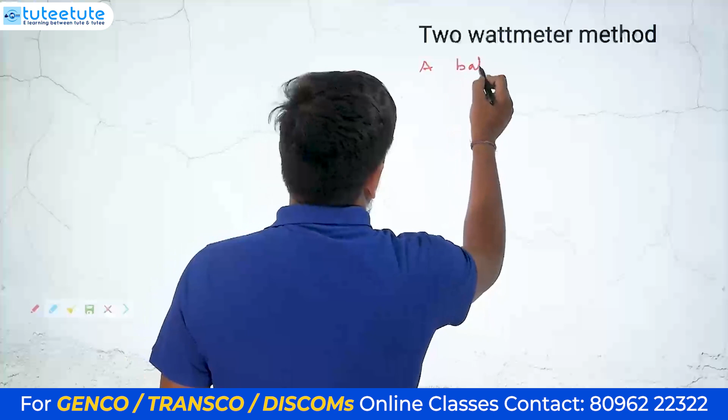So a balanced star connected load we are taking here. Understood, right? Anyway, we can take it as star connected and balanced. We can take it as 3-phase 4-wire or 3-phase 3-wire, anything. Star connection means there's a possibility of a 4th wire also, the neutral wire.

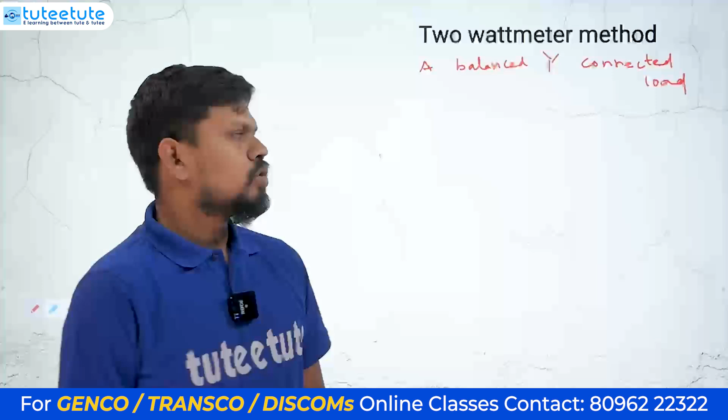Since it is balanced, no current will go through the neutral. So we can take it as 3-phase 4-wire or 3-phase 3-wire also. I am just taking a 3-phase 3-wire connection.

So first load we have taken, second load also we have taken, and third load we have to take. Like this, all the 3 loads are connected in star connection. So all the 3 loads we have taken and connected in star. This is star connection.

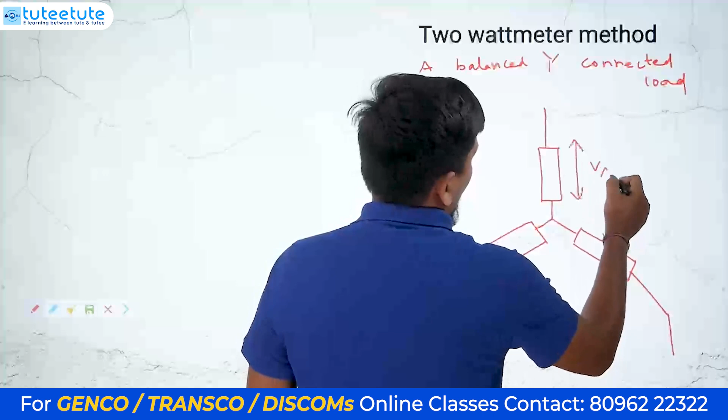Understood, right? So this is star connection. I am just taking the phase voltages. The voltage across this one is VA voltage, but otherwise you will take it as RYB, that will be more useful for you to understand. So VR, this is R phase, and this is Y phase. I'm taking this one as Y phase, and this is B phase. 3 phases we are taking.

If you ask me what is the phase sequence of this, I will tell you it is RYB phase sequence. You might already know about this. To find the phase sequence, we should not count in the clockwise direction like this. These are the vectors, otherwise we have to consider the 3-phase loads. First the R phase, and after that, which phase is coming after 120 degrees? The Y phase is coming. They are all rotating, so we have to give your hand here and check.

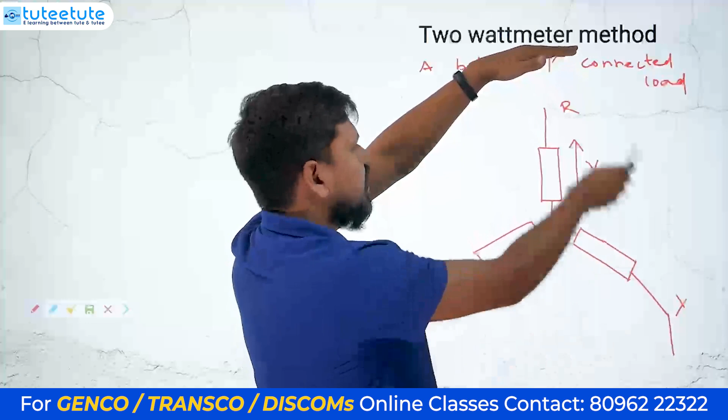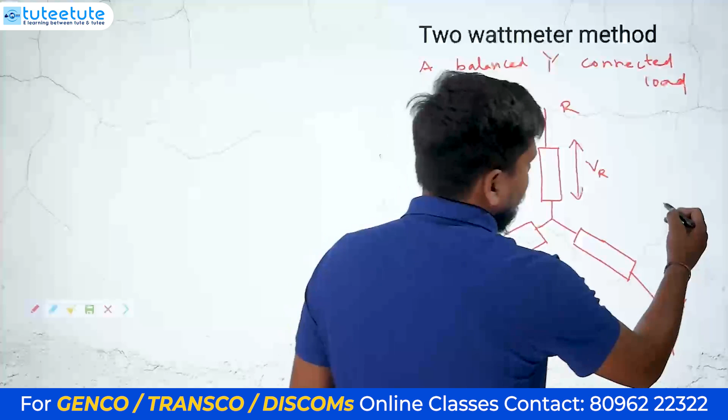First the R phase is going, and these are all rotating in the anti-clockwise direction. After that, the Y phase is coming, and after that, the B phase is coming. Understood, right? So anyway, these 3 are rotating in the anti-clockwise direction like this, one phase after another. So what is the phase sequence here? The phase sequence is R, Y, B.

So R, after that Y will come, after that B will come. Some lecturers will tell you that the vectors are rotating in anti-clockwise direction only, but while counting you have to count in the clockwise direction. That's wrong. You may get the correct answer, but the analysis is wrong. The vectors are rotating, so why do we have to move your hand to understand? You have to see the vectors.

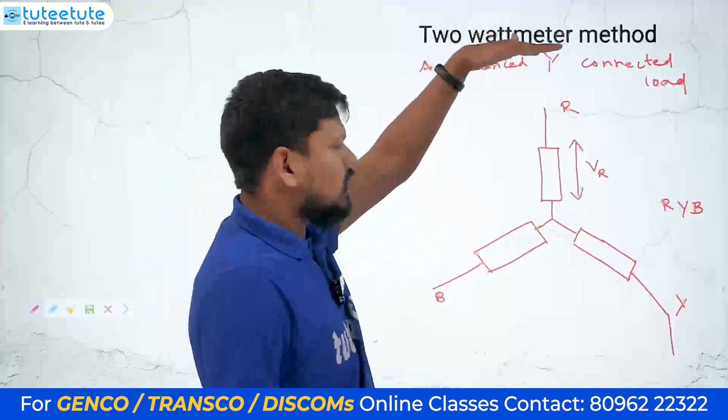See from the top, or from any place. See from here, first what is going? The B terminal is going, after that the R terminal will go, after that the Y terminal will go. So it's B, R, Y. Otherwise we can write it as R, Y, B. Take this one to the other side: R, Y, B. Otherwise you can take it as Y, B, R. Everything is the same, after that B, R, Y. So everything is the same only.

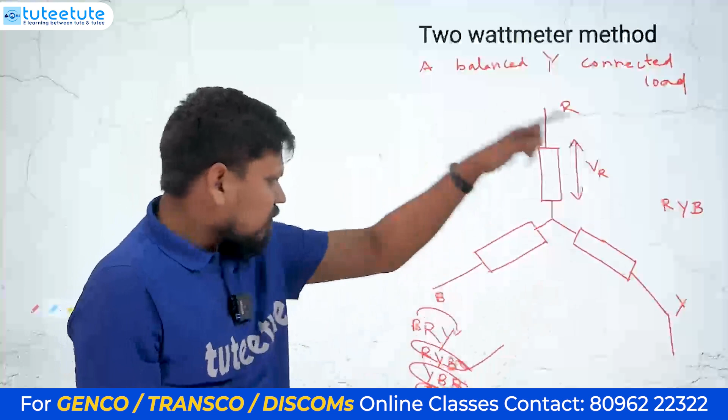Any sequence mentioned like this is nothing but the RYB phase sequence. See, B phase is going, after that R phase is coming, after that Y phase is coming. That is how we take the phase sequence of any vectors. Any vector, whether voltage, current or anything, we take it like this only.

Never move your hand like this. Why do we move our hand? To understand that they are already rotating, right? You just have to see. They are already rotating, the vectors are already rotating in the anti-clockwise direction. See how they are rotating.

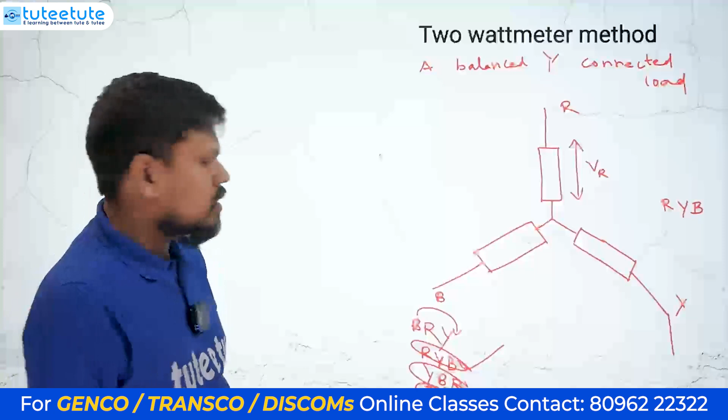After one, which is coming? R phase is going, right? Y phase is coming, after that B phase is coming. We have to understand it like that. So this is the RYB phase sequence. We have understood this one.

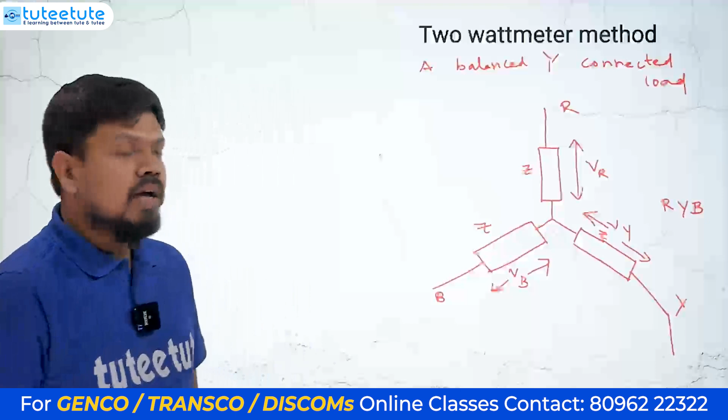So phase voltages: I am giving VR voltage, this is VY voltage, and this is VB voltage. ZA, ZB, ZC are all same here, yes or no? All the impedances are same. Why is it same? Because it is a balanced load.

We have taken a balanced star connected load here. That means all the impedances are same and their angles also same, at an angle of phi, Z at an angle of phi, Z at an angle of phi.

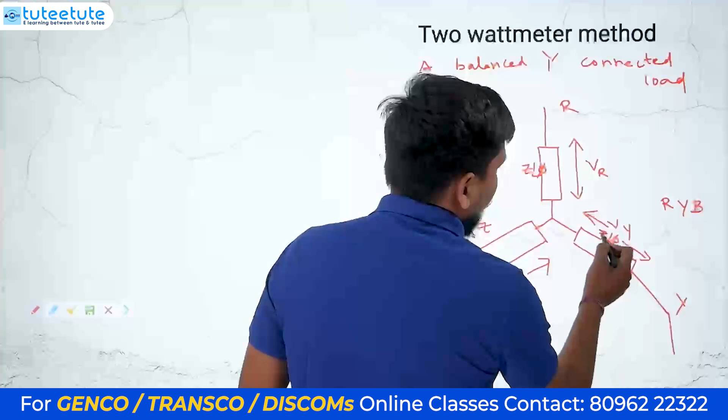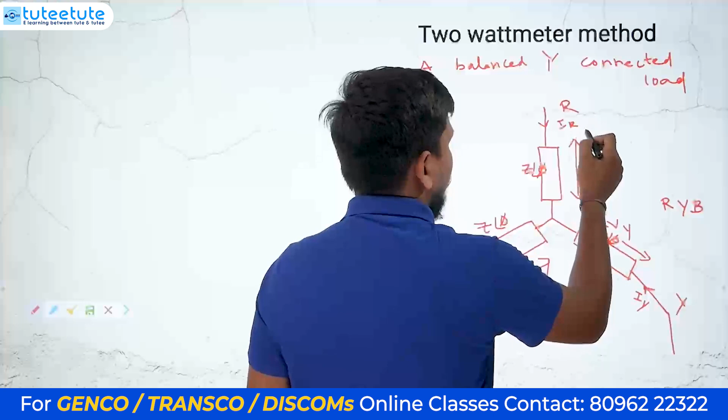That means there is some current in this one, there is some current in this one. What is that current? I will take this as IB, this current as IY, and this current as IR. So I have just taken the currents IR, IY, IB.

Now what is the angle difference between VR and IR? That will be equal to phi. Yes or no? The angle difference between VR and IR is phi only. This phi is nothing but the impedance angle of this one.

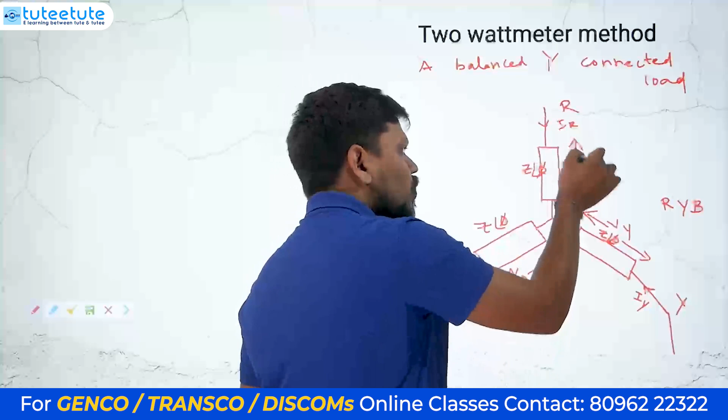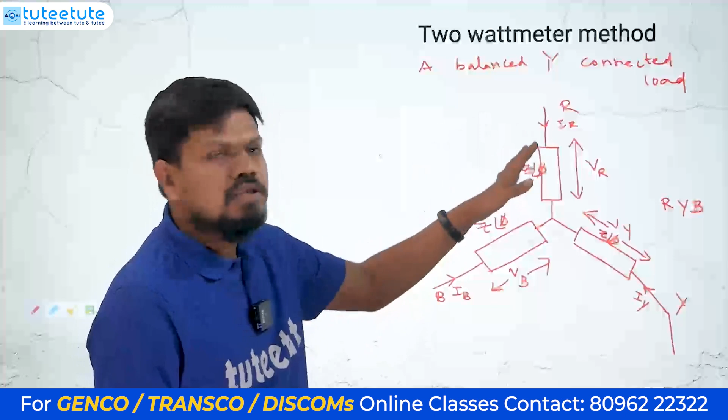So if you take the current and voltage in this one, what is the angle difference between those two? The impedance angle is nothing but the power factor angle for this load, because only one load is there. If any other load is there, both power factor angles and impedance angles you have to make as a single equivalent one.

After that, we have to calculate the equivalent angle. So like that we have to see this one. So the angle difference between VR and IR is phi. Similarly, the angle difference between VY and IY is also phi. The angle difference between VB and IB is also phi here.

We have just given the three phase load, not connected any wattmeters here yet. We have not connected any wattmeters yet here. So we have to connect some wattmeters. How many wattmeters do we have to connect? We have to connect only 2 wattmeters here.

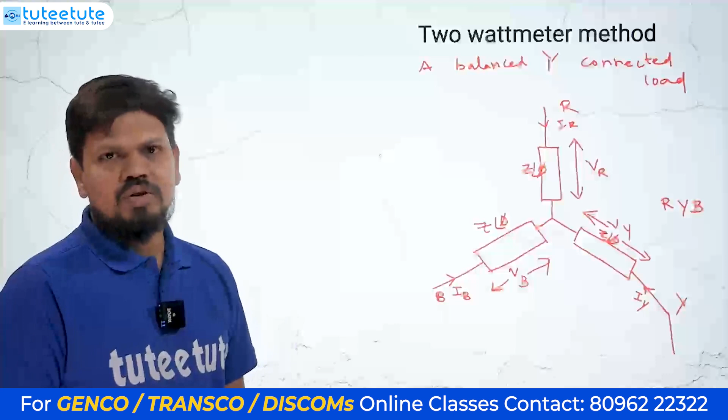Only 2 wattmeters you have to connect. So I will tell you where to connect these. I will connect 1 wattmeter in R phase. That means current coil in series with the load, and the potential coil we are connecting.

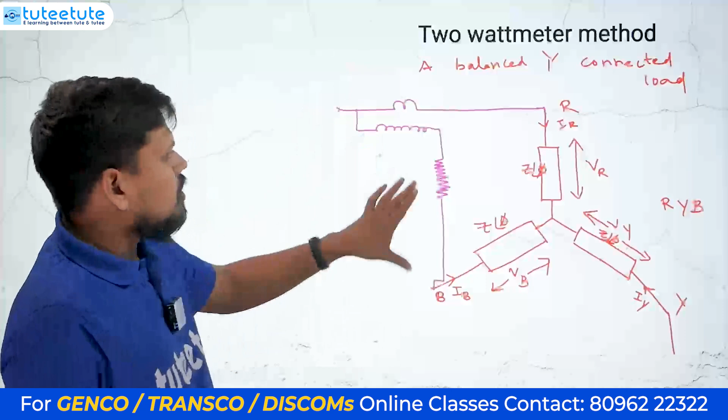So this is the potential coil we are connecting across the load. I'm just connecting here across some load, so across this some voltage has to appear. This is Rse, this is potential coil, this is current coil, and this complete one is nothing but 1 wattmeter, W1.

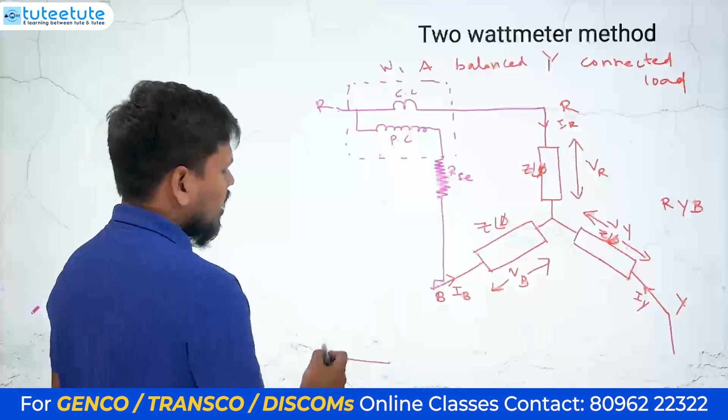So W1, understood, right? That is the first wattmeter. Now the second wattmeter you have to connect. Where to connect? I am connecting it in Y phase. After R phase, this is R phase, and I am connecting in Y phase. I will connect the current coil in series with the load, and the potential coil has to be connected across the load.

So potential coil I have taken, and for the protection of this coil, I am connecting a resistance, Rse, which we have already discussed. We have to connect one series resistance for the protection of the instrument and the protection of the load also, so across the load, across the potential coil, there should be some voltage applied.

So anyway, we have connected 2 wattmeters. This is nothing but the second wattmeter. So we have connected 2 wattmeters: this is potential coil, this is current coil, and this is wattmeter number 2.

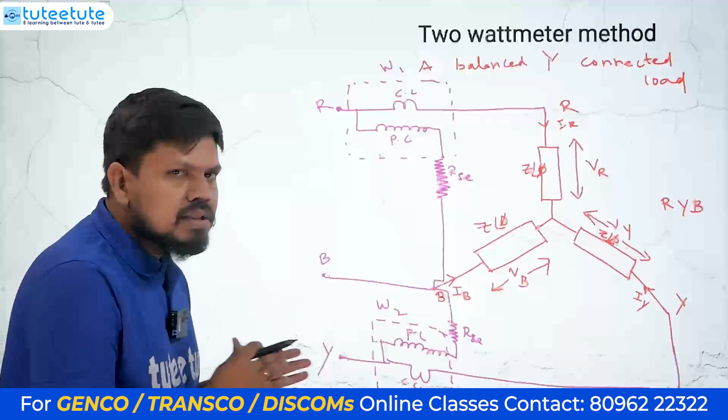Okay, so this is the B phase, B phase line. This is B, this is Y, and this is R. So we have just connected 2 wattmeters, this is W1 and this is W2. We will check these wattmeter connections and what is the wattmeter reading in the first one and second one. Later we will check whether it is reading the three-phase power or not.

So this is a star connected balanced load we have taken. You may get doubt, can we take delta connected load? You can connect, no problem, you will get the same type of analysis. Can we connect unbalanced load? You can connect unbalanced load also, for everything this method works. But from your exam point of view, whatever formulas you get here for the balanced star connected load, those things will work for you. That's why I'm giving this method. You can try other methods also, whatever procedure we are doing, you have to follow like this only.

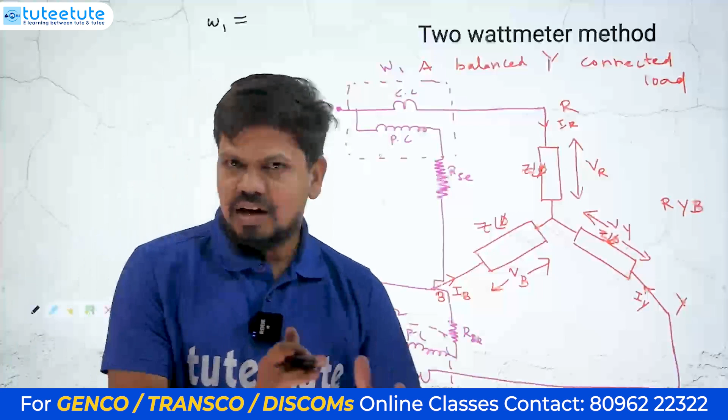Okay, we will write the wattmeter readings, W1 and W2 now. Let's take W1, what is the W1 reading? The wattmeter 1 reading is, so we have already understood, wattmeter reads the voltage across potential coil into current in current coil into the cosine of angle difference between the voltage and current, whatever it is.

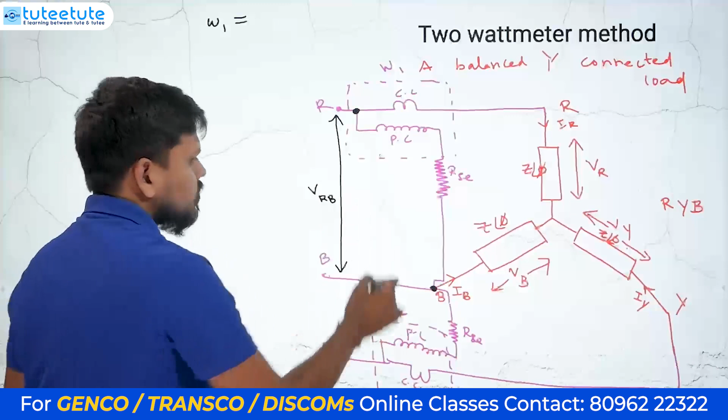So let's take, what is the voltage across this potential coil? First wattmeter W1 we are writing. So voltage across this potential coil means voltage between these two terminals. Tell me what is the voltage? So it will be the voltage between these two, that is VRB, yes or no? The voltage difference between these two is VRB. So R to Y, R to B we have to take. So that is VRB into the current in current coil.

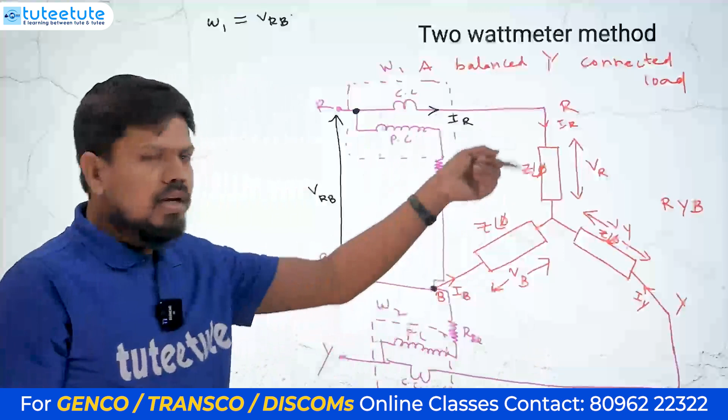What is the current in current coil? So current in current coil is IR only. So IR is nothing but line current here, but here it is phase current. This is star connection, right? Line current and phase current will be the same. So we will just take this one as IR, and cosine of angle difference between them, so tell me, cosine of angle difference between VRB and IR.

So actually, this phi we have taken means the angle difference between voltage and current we have taken. What is that voltage? This VRB voltage. What is that current? That is IR current. So angle difference between VRB comma IR. So anyway, the angle difference between VR and IR we have, that is phi, yes or no? The angle difference between VR and IR, phase voltage and phase current is phi, but this is line voltage and line current.

This is also a phase current also, but we don't have angle difference between VRB and IR directly. We have to check that angle later, by drawing the vector diagram we have to understand that angle. So anyway, W2 we will write. Wattmeter 2 reading will be equal to V, what is the voltage across this one? Wattmeter 2, just see across the potential coil, what is the voltage? That means between this point and this point. So what is the voltage means? So you can check, this is the voltage, that means VYB. So VYB will be the voltage across this potential coil, second wattmeter potential coil. And what is the current in this current coil? That will be IY, yes or no? Current will be IY here.

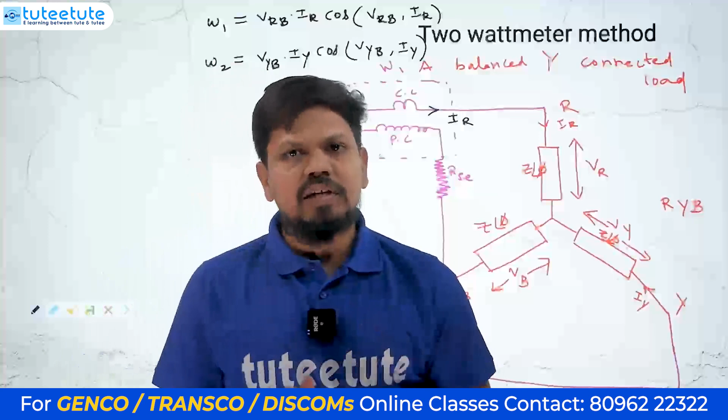So anyway, VYB into IY into cosine of angle difference between VYB comma IY. So we have to find these angles. Whenever you find these angles, then only you can calculate the complete power whatever these are measuring, W1 and W2. These wattmeters are giving some readings, we have to understand whether this complete reading is the total three-phase power or not. So we have just taken one load, checking whether it is working or not, whether the 2 wattmeter method is working or not.

So to understand these angles, we will just draw the vector diagram of these voltages and currents. So I am just taking R phase, Y phase and B phase voltages. We will take R phase VR and Y phase, which is 120 degree apart. So this is Y phase and this is voltage VB. So three voltages we have given, VR, VY and VB.

Okay, so we need VRB and IR, and similarly VYB and IY.

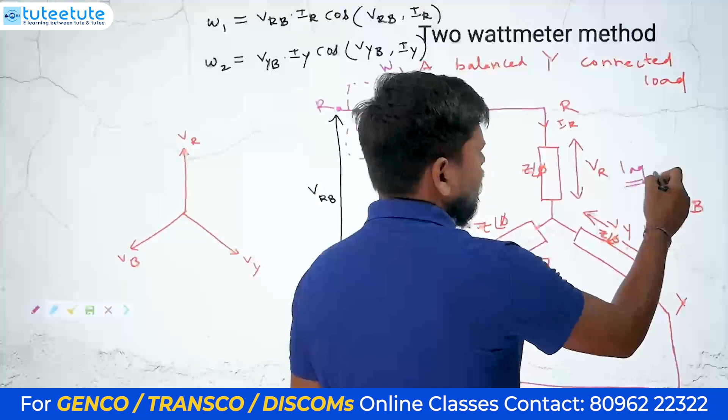Currents. Now tell me, this is lagging power factor we will consider. Generally, many of the loads will be inductive loads. So I am just taking this one as a lagging load. Lagging load means inductive load only, RL load it will be.

That means current lags the voltage or voltage leads the current in RL load. In RL load, current lags the voltage, we know already. Otherwise, voltage leads the current by an angle. What is that angle? Between 90 to 0. For the perfect resistor, it is 0 degree. For perfect inductor, it is 90 degree. For perfect capacitor, it is minus 90 degree. For RL load, it is between 0 to 90. And for RC load, it will be minus 90 to 0.

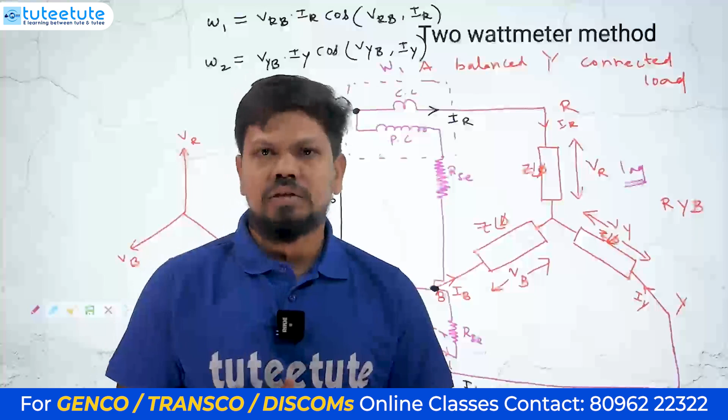We have already understood these things in AC analysis. That's why I told at that time, if you can understand AC analysis properly, many of the subjects become very simple to understand. Even power systems, measurement, some power electronic concepts and machine subjects are all related to AC concepts. So you have to understand AC analysis properly, then only it is possible to understand all the remaining subjects related to that. So we will see this one.

So VR, VY and VB voltage we have given. Let's draw the currents, IR, IY and IB. So anyway, current IR lags VR voltage by an angle of phi. This is lagging load, right?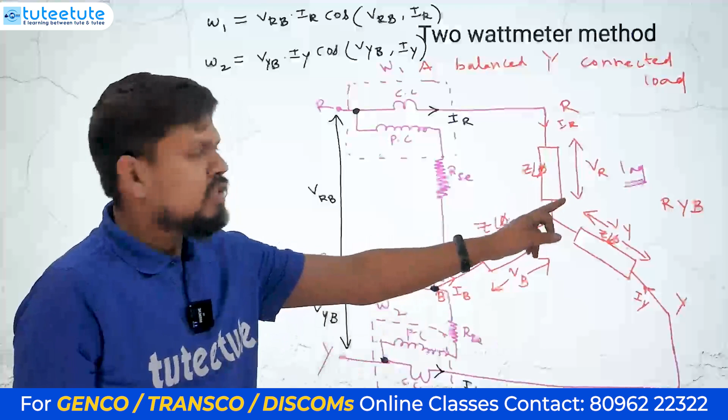So anyway, all the loads are balanced. This is balanced load, so the other loads are also lagging. Okay, so we'll just draw the currents. This current is lagging by an angle of phi here, this is IR current. Similarly this current is also lagging, that is IY current, same magnitude it will be. Similarly this is IB current.

So this is IB current, RYB phase sequence. You can see here also I am following the same phase sequence. So R is going, after that Y is going, after that B is going, same phase sequence we are giving here. What is this angle? That will be phi, yes or no? This angle is also phi and this angle is also phi. Because this is balanced load, for everything you will get the same angle of phi.

So anyway, we need the angle difference between VRB and IR. We have to know this VRB vector, and we have to know the IR vector. After that, we have to get the VYB vector and the IY vector. So just check, any vectors available for us? IR vector is available, and similarly IY vector is also available.

So what you have to draw now? You have to just draw VRB vector and VYB vector. So we can write down VRB. Just tell me how you can write down VRB. So VRB equal to VR minus VB, yes or no? VRB is nothing but VR minus VB. Otherwise you can write it like VR plus minus VB. So that means if you add these two vectors, you will get VRB.

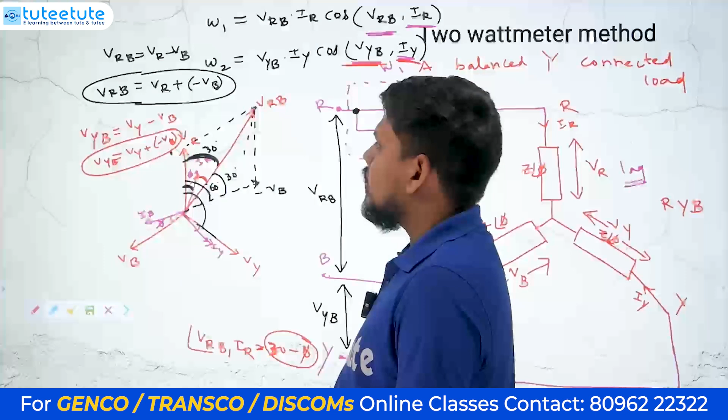We have to calculate one more angle, that is VYB and IY. How can you write down VYB? VYB you can write as VY minus VB, otherwise VY plus minus VB. We have minus VB and VY, so you just extend this one like this, and this also you extend like this.

Already this is 60 we have understood. From here to here it is 60 and here to here also it is 60 degree, and if you calculate the equivalent of these two, you directly get 30 degree here and 30 degree here. This is VYB, and we need the angle difference between VYB vector and IY. VYB vector is here and IY vector is here.

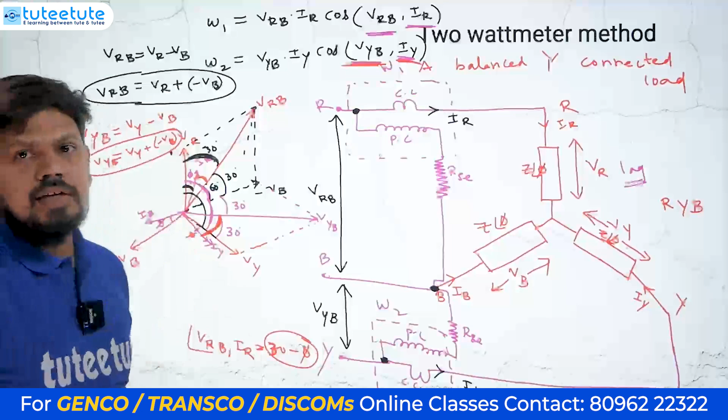I will just draw the angle. We need the angle difference between VYB and IY. That will be equal to 30 plus the angle difference between VY and IY, which is the phi angle given already. So you get 30 plus phi. The angle difference between VYB comma IY will be equal to 30 plus phi. So these two angles we got now.

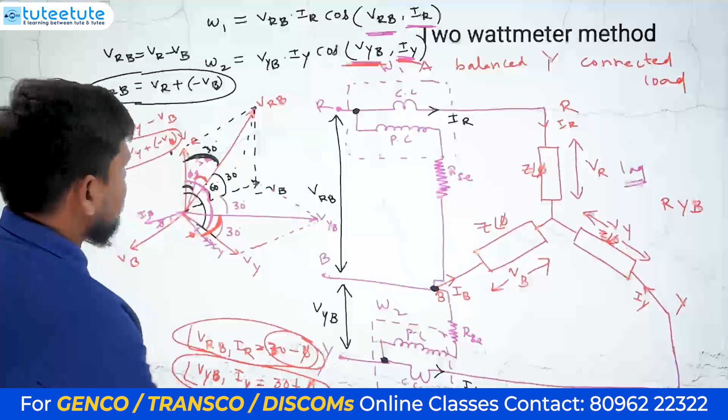So one angle is the angle difference between VRB comma IR. VRB is here and IR is here, so the angle difference is 30 minus phi, and if you take the other one, that is 30 plus phi. Understood, right? So 30 plus phi you got like that. Okay, so if you calculate these two angles, now you need to substitute these angles here.

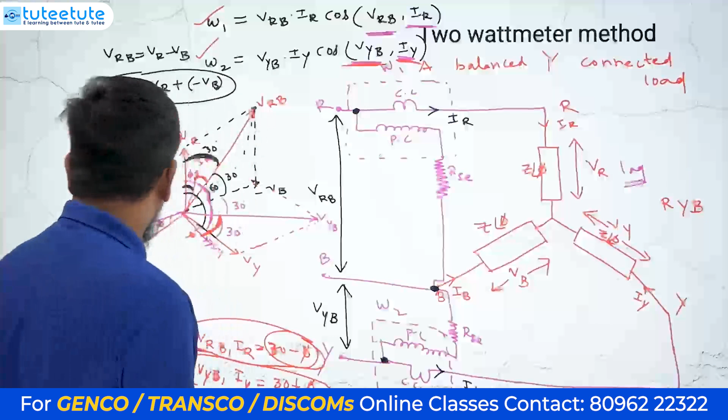In these wattmeter readings W1 and W2, we have to just give the angles. Substitute those angles there. So anyway, we will write those things now. So just try to see the angles. We have to write down these angles, and I'm writing W1 equal to VRB IR cos of angle difference between VRB comma IR.

This is the first wattmeter reading, and the second wattmeter reading W2 equal to VYB IY cos of angle difference between VYB comma IY. So this is the second wattmeter reading. We have to substitute those things. One is 30 minus phi, another one is 30 plus phi. You got it already, so just remember that.

Now tell me, this is star connection, right? For star connection, and star balanced connection it is. For star balanced connection, we can give some conditions. So we can directly give one thing: VRB equal to VYB equal to VRY equal to VL. That is line voltage. Yes or no? Between two lines it will be, so we can give that as line voltage.

And similarly IR, IY and IB, these are all line currents. We can take these as the phase currents also, no problem, but it is line current also, so I will just consider it as IL. All this is balanced, so all the currents and all the voltages will be the same. All line voltages we can take as VL, all line currents as IL. We'll substitute these things in the wattmeter readings.

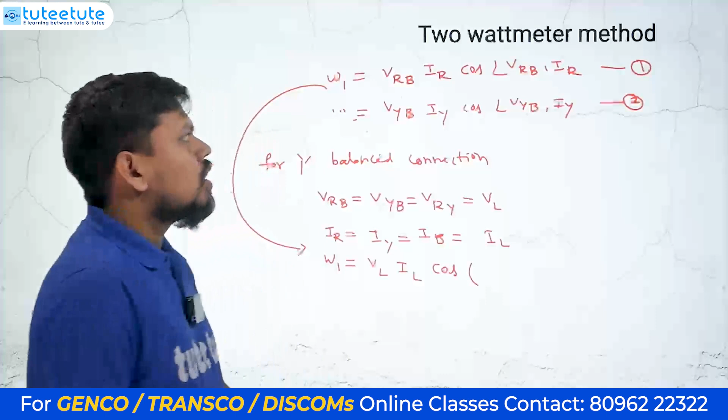So what is the W1 reading? VL into IL into cos. Tell me what is the angle you got for VRB comma IR? That is cos of 30 minus phi. Understood, right? Under W2, you got VL IL cos of the angle difference between these two, which is 30 plus phi. So these are the two equations you have to remember.

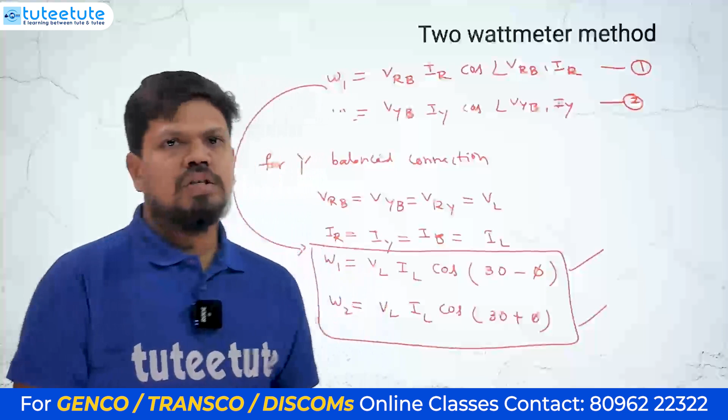For your exam you just have to remember these two equations. One wattmeter reading is VL IL cos 30 minus phi, another one is VL IL cos 30 plus phi. If you can remember these, many of the problems they give on wattmeters you can answer easily. But we have not checked yet whether this two wattmeter method is working, whether it is reading 3-phase power or not.

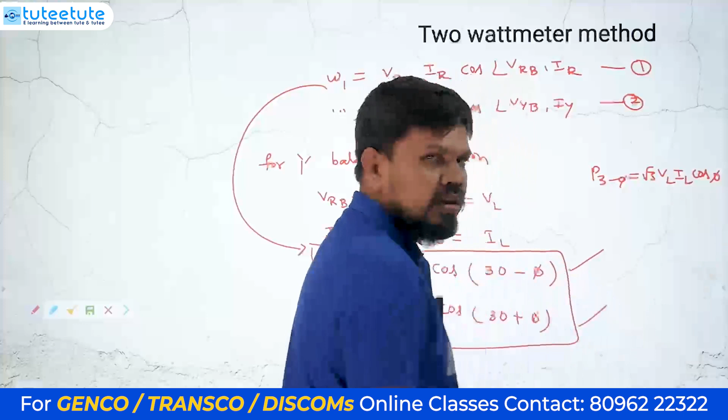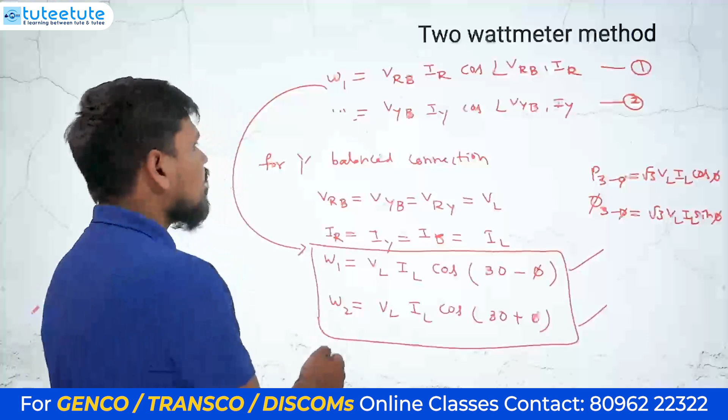What is 3-phase power? P 3-phase equal to root 3 VL IL cos phi. You have to get this, then only the two wattmeter method is working. Similarly reactive power 3-phase is root 3 VL IL sin phi. You have to get this active and reactive power, then only this two wattmeter method is working. Anyway, the two wattmeter readings we got like this.

We will just add these two and check what we get. So add W1 plus W2. VL IL will be common, into cos 30 minus phi plus cos 30 plus phi. This is cos A plus cos B. You will get 2 cos A plus B by 2 and cos A minus B by 2.

So directly we can write VL IL into 2 cos A plus B by 2. This is A and this is B. A plus B by 2, that means 30 minus phi plus 30 plus phi divided by 2, means cos 30 you will get. So cos 30 and cos A minus B by 2. A minus B by 2 means minus 2 phi divided by 2. Anyway, cos minus phi is nothing but cos phi, so we'll get cos phi.

Okay, so like this you got. So anyway, if you substitute this one, VL IL into 2 into cos 30. Cos 30 is root 3 by 2. So root 3 divided by 2 into cos phi you got. So this is the complete one. So 2 will be cancelled. You will get root 3 VL IL cos phi.

So this is W1 plus W2. Understood, right? This is W1 plus W2, and this is nothing but 3-phase power in the network. 3-phase power in that load is nothing but the complete W1 plus W2. That means if you add those two wattmeter readings, you will directly get the 3-phase power.

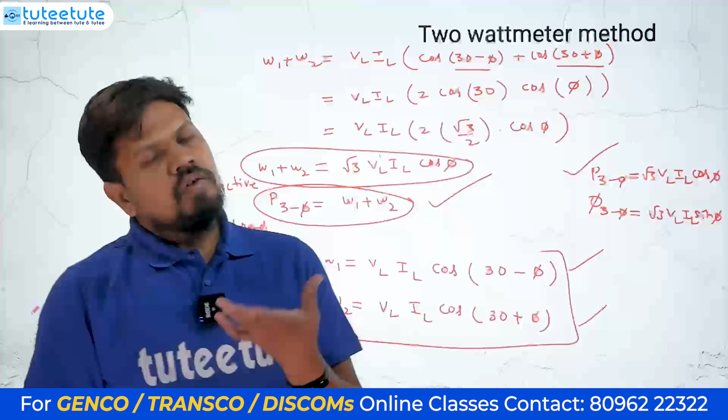So total active power in 3-phase network, 3-phase load, you can write. We have just checked for the balanced load only. You can check for the unbalanced load also. You will get the answer. So this 2 wattmeter method will work for both balanced and unbalanced loads, and star connected load and delta connected load also.

So anyway, this is active power only we have calculated. If you check the reactive power, what is the reactive power? So if you just check W1 minus W2, you will get VL and IL. You can check your copy, I have just removed it here. So VL IL will be common here, and cos of 30 minus phi minus cos of 30 plus phi.

So this is the cos A minus cos B formula. So we will get minus 2 sin A plus B by 2 sin A minus B by 2. You can learn these things in trigonometry. If you get any doubt in trigonometry, just check again. We have to understand some trigonometry formulas here. So that is VL IL into minus 2 sin A plus B by 2. A plus B by 2 means 60 by 2, that is 30.

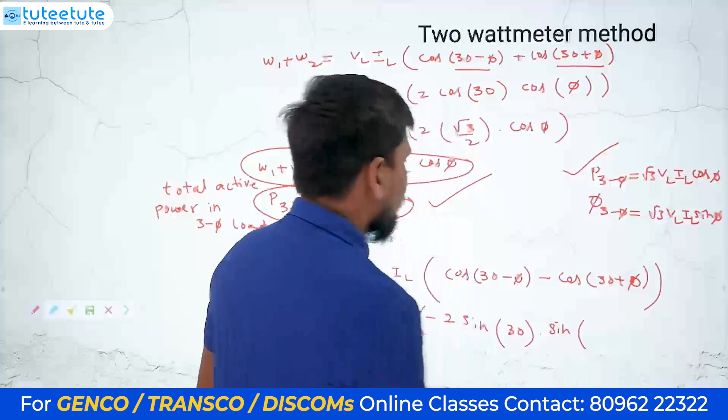So into sin A minus B by 2. A minus B by 2 means minus 2 phi divided by 2, you will get minus phi. Sin of minus phi is nothing but minus sin phi. That minus and this minus will be cancelled, and you will get sin 30, that is 1 by 2. So 2 and 2 will be cancelled. You will get VL IL sin phi. So this is W1 minus W2.

But see the reactive power, that is root 3 into VL IL sin phi. That is total reactive power. What is this reactive power? Is this for single phase? This is not for single phase. Single phase reactive power you can give as V phase I phase sin phi. But this is in line voltage and line currents. So that is not single phase reactive power.

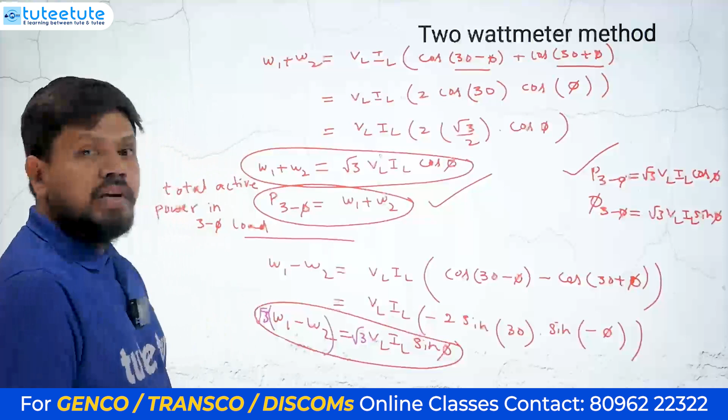This is some reactive power component only, not single phase, not 3-phase directly. But to make this one, I will just multiply this one with root 3 here. So if you just multiply with root 3, this is root 3 VL IL sin phi. Now you can tell this one as reactive power.

So what is the complete reactive power? Q3 phase we can give as root 3 into W1 minus W2. So this is the complete reactive power in the load. So by using these two wattmeters only we are getting it.

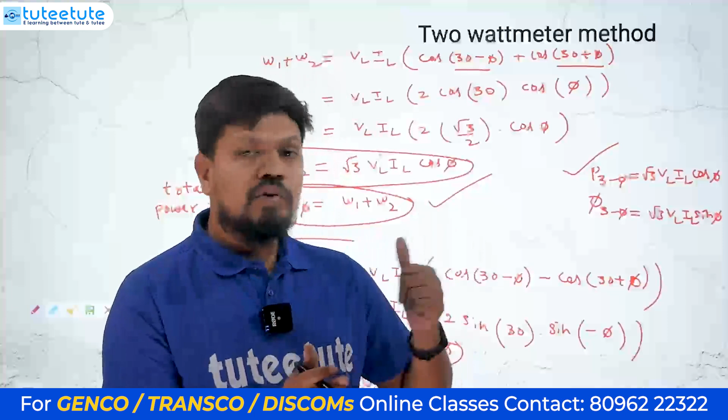So see what we are doing. For some three-phase load they have given you, you have connected two wattmeters, and two wattmeter readings you can see as they have indicated. W1 reading it has indicated, and W2 reading also it has indicated. So if you add those W1 plus W2, you can get that load's three-phase active power.

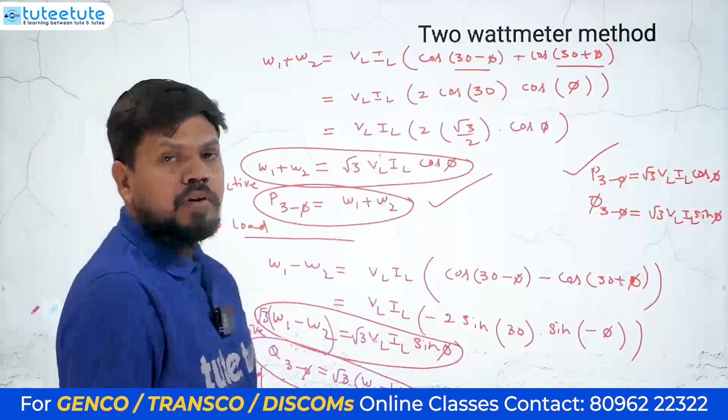Understood, right? And if you get W1 minus W2 and multiply with root 3, then you can get the complete reactive power in that three-phase load. This is three-phase active power, and this is three-phase reactive power. This is total reactive power in three-phase load. So that's how we have to understand the active and reactive power.

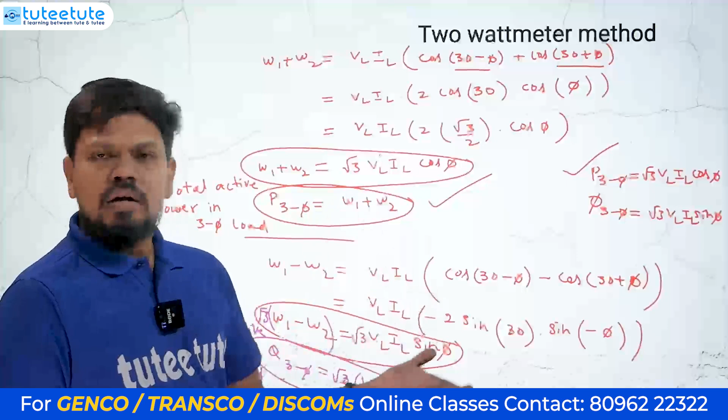That means using these two wattmeters only we are measuring the active power and reactive power. So that means by using this two wattmeter method you can measure any of the three-phase power, either active or reactive power. Similarly, we can find out one more thing.

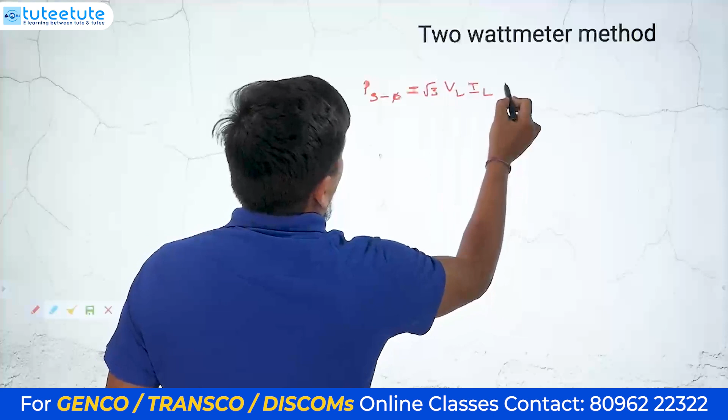I will just write the formula. So the formulae are: three-phase active power we can give as root 3 VL IL cos phi, that can be given as W1 plus W2. And three-phase reactive power we have given as root 3 VL IL sin phi, and we can give that as root 3 into W1 minus W2.

So we have just understood these two, and once you have active and reactive power, can you give the power factor angle phi for that load? Power factor angle phi equals tan inverse. We might have learned this in networks, in AC analysis. The power factor angle phi equals tan inverse of reactive power divided by active power, that is Q3 phase divided by P3 phase.

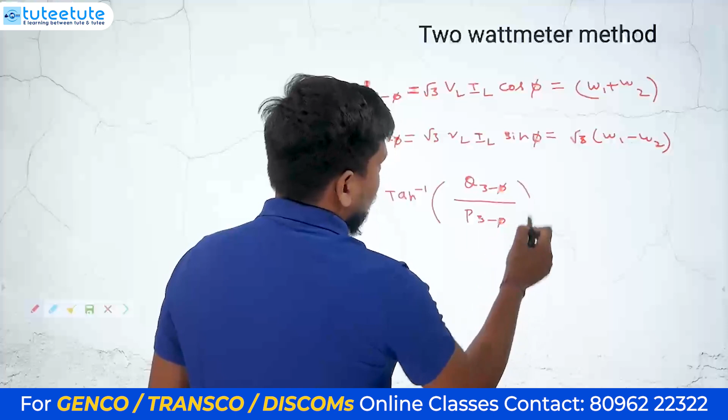We have to give it like this, using the wattmeter powers. That means root 3 W1 minus W2. So we can give it as tan inverse of root 3 W1 minus W2 divided by W1 plus W2. This is the formula we have to remember. These are all the formulae that will directly help with the questions.

They will give W1 and W2 readings, and directly ask what is the power factor angle, or what is the power factor. Once you calculate the angle, we have to get the power factor also, which is nothing but cos of this angle. So this is which method? Two wattmeter method only, everything is two wattmeter only.

So by using two wattmeter method you can measure active power and reactive power. Some questions will be there on this. Can we measure reactive power by using two wattmeter method? We can measure the reactive power also. You just have to do W1 minus W2 into root 3. We have already seen, to get the complete reactive power in that three-phase network, we just have to do W1 minus W2 into root 3.

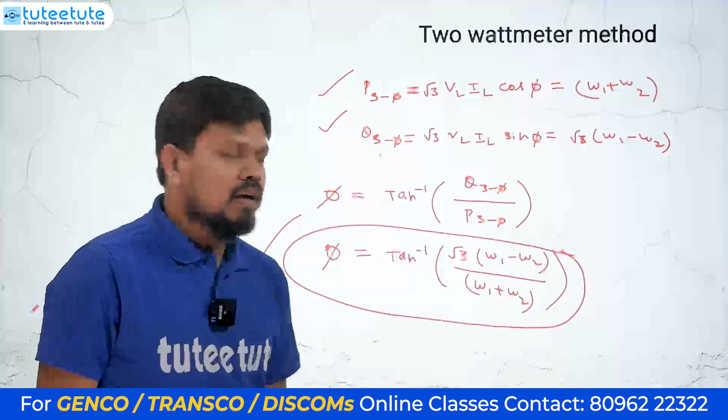So that's how we have to understand the complete active and reactive power in the networks and in the three-phase load, and the power factor angle phi equals tan inverse of root 3 W1 minus W2 divided by W1 plus W2. The same formula only, they might have given it like this.

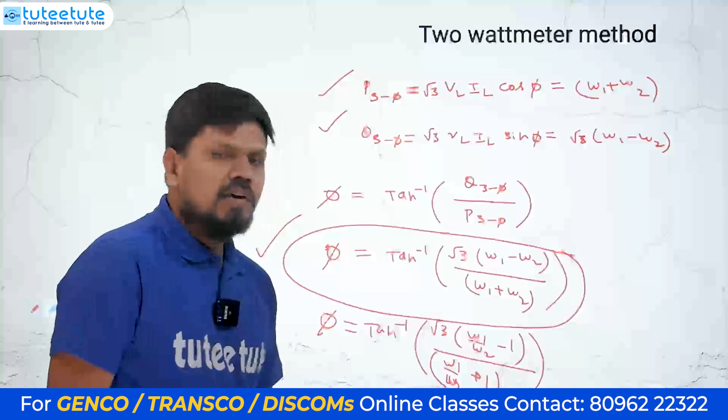The tan inverse root 3, I will take W2 as common. So we will get root 3 into W1 by W2 minus 1, divided by W1 divided by W2 plus 1. We can write it down like this, and W2 will be cancelled, whatever is common. In some exams they will give it like this, so no need to confuse, every formula is the same. Just take W2 common here. So like this we have to understand the power factor angle also.

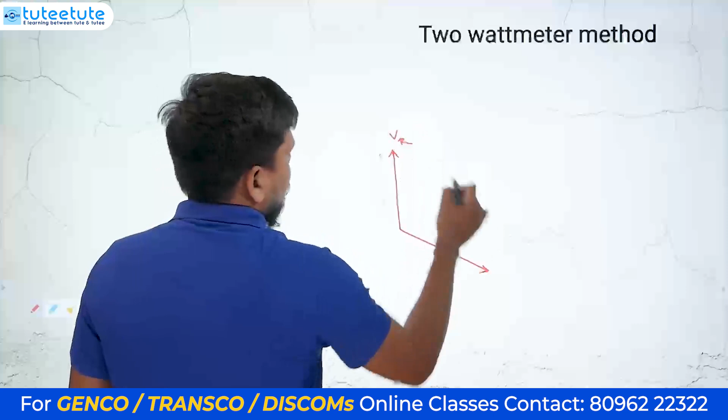Understood, right? So anyway, for your understanding, I will just draw the vector diagram again. See the voltages we have taken: VR, VY and VB. We need the angle difference between VRB and IR.

We have seen already for the first wattmeter. So we have just taken minus of this, minus VB we have taken. If you add these two, extend these two, for the adding you have to draw the parallelogram. So we have just drawn the parallelogram, and similarly here also for this, VY minus VB we have to calculate.

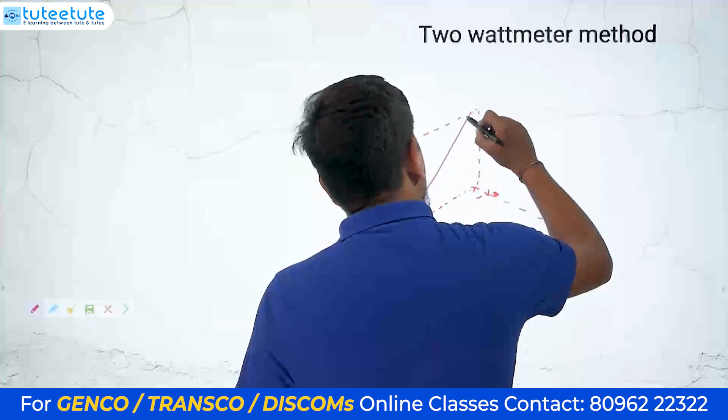That means just add these two and extend, okay, as the parallelogram. So you will get the equivalent as VRB, okay, and this one is VYB. Okay, so we got two voltages, and if you check what is the angle difference between VR and VY, that will be equal to 120.

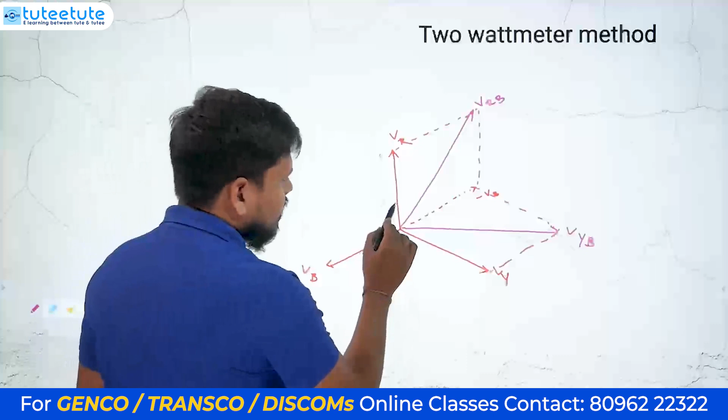So if you check this angle, that is 60 degree, and from here to here also it is 60 degree. Okay, and if you check this angle, that is 30 degree. Okay, we have already seen, that means this is also 30 degree.

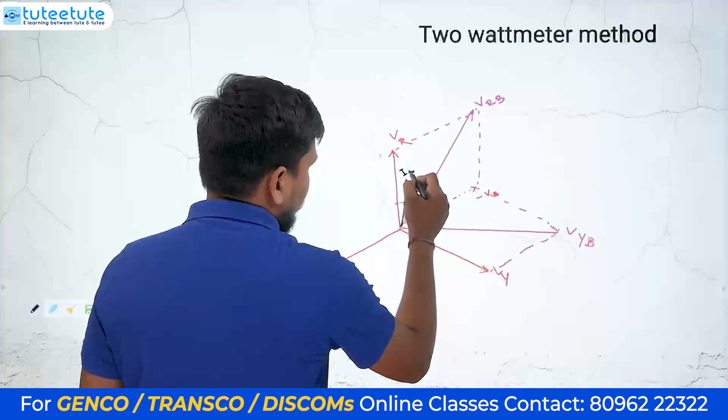And where is IR? IR is here. Okay, so we'll just draw this one. So IR angle is here, IR vector. Okay, so IR is here. What is this angle? That is phi. Okay, so this angle is phi, and similarly where is IY? So this is IY. Okay, so that angle is also phi angle.

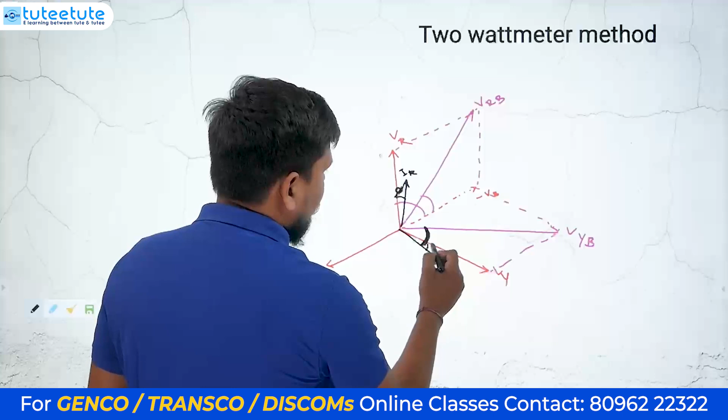Okay, we need this angle. So what is this angle? VYB and IY, that is 30 plus phi. Okay, so what is this angle? Angle difference between these two, that is nothing but 30 minus phi.

Okay, so just for understanding I have given again. Okay, because at that time, so all the angles we used to explain, right? Okay, we will not get properly, so that's why I have just given it again. Okay, let's try it. Anyway, some more points we have to understand from this one.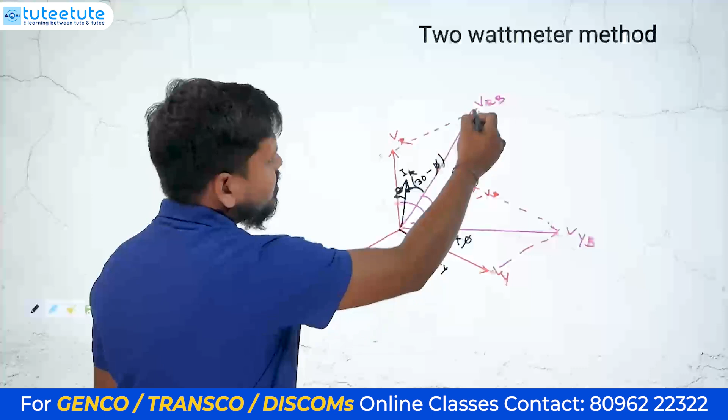So you can check, right? This is the star connection. In star connection, line voltage have more magnitude or phase voltage have more magnitude. See, this is the line voltage and this is the phase voltage. Understood, right? Now see, line voltage has more magnitude when compared to phase voltage.

Understood, right? So that means one more thing we have to understand. VR is this one and VRB is this one. What is the angle difference between the line voltage and phase voltage? That means we can get here 60 degree, 30 degree of angle difference. Understood, right? So 30 degree of angle difference is there between those two.

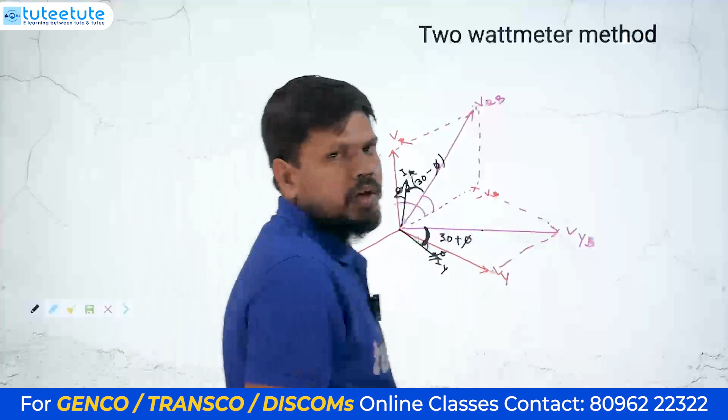Understood, right? So like that we have to understand. Between these two also 30 degree is there. If you draw one more, between those two also there will be 30 degree of difference. Understood, right? So like that we have to see the angles, okay, and magnitudes of these vectors, voltage vectors and current vectors.

Anyway, in delta connection also we can make all these things. So actually if you have any time to understand the vectors separately, just understand the three-phase networks, spend one day or something for the three-phase networks, you will get many of the concepts. So solve some 20 to 30 problems on three-phase networks, you will definitely understand many concepts that will help you to understand many of the power system concepts, power electronic concepts and machine subject concepts. Okay, so before understanding these subjects, just learn the three-phase networks and learn the powers and angles and vector diagrams, everything. That will be more helpful for you to understand.

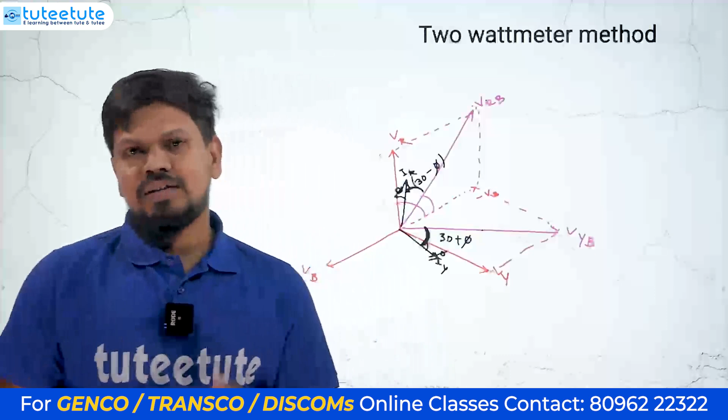Okay, so that's how you have to give the powers in three-phase network by using the 2 wattmeter method only. Understood, right? So this is how you have to understand the 2 wattmeter method. We have just understood the 2 wattmeter method works for both delta connected load and star connected load, and it will perfectly work, whether it is unbalanced or balanced.

Okay, so for everything this 2 wattmeter method works. Actually there is 3 wattmeter method also. Yes or no? There is 3 wattmeter method also, that is nothing but connecting each wattmeter in all the 3 phases. Then there is nothing to learn, right? Directly powers we have to give, so it will read the power anyway. Understood, right? So there is nothing to learn.

So that's why 2 wattmeter method we have learned, and those formulas whatever I have given: the first wattmeter reading W1 equal to VLIL cos(30 minus phi), and second one VLIL cos(30 plus phi), and if you add these two you will get the active power. If you subtract these two and multiply with root 3 you will get the reactive power, and power factor angle phi equal to tan inverse of root 3 times (W1 minus W2) divided by (W1 plus W2). These formulas we have to remember anyway. In every exam you will get these things.